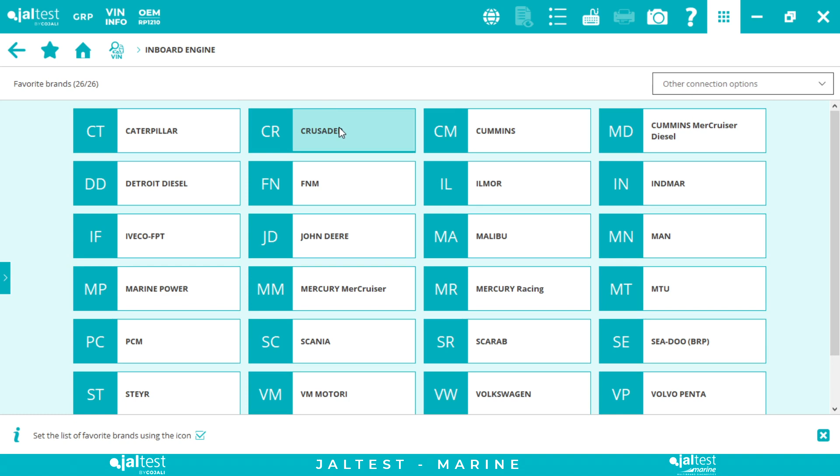Also very important brands like Crusader, Ilmor, Indmar, Malibu, Marine Power, Mercury, Mercruiser, Mercury Racing, PCM, Scarab, Sea-Doo. We have some gasoline inside Volvo Penta and Weber.

Let's go to outboards. Everything is gasoline: Evinrude, Honda, Johnson, Mariner, Mercury Racing, Nissan, Selva, Seven Marine, Suzuki, Tohatsu and Yamaha. Then we have watercraft, obviously gasoline: Honda, HSR-Benelli, Kawasaki, Sea-Doo and Yamaha. And we have stationary engines, which are all diesel.

We have 24 brands here, because one is a customized brand and model that I did, because they buy the engine from another manufacturer, so we can always customize our brand and model. So we have 24 different brands. Caterpillar, Cummins, Detroit, Deutz, I'm just gonna say the most important ones, John Deere, Kohler, Kubota, Mercedes, MAN, MTU, Perkins, Volvo Penta, Yanmar again.

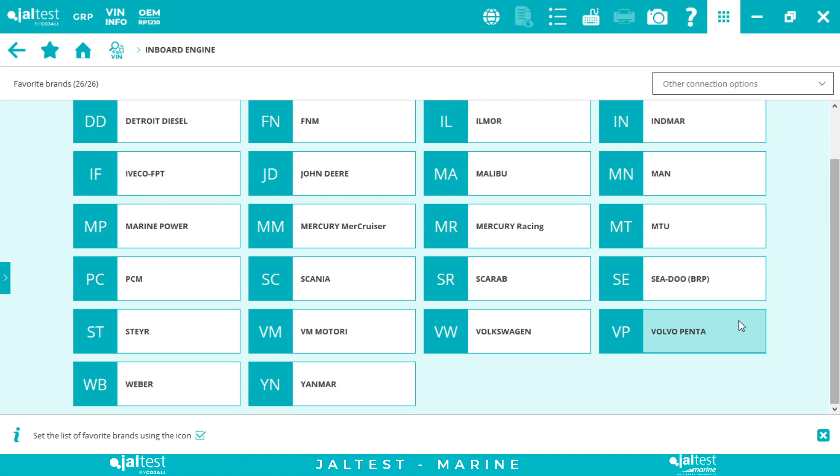Let's do a quick example. Let's go into inboards, to Volvo Penta. We have gasolines and diesels. Let's get into a diesel, for example, a D9. We're gonna see that Jaltest is an all makes, all systems diagnostic tool. In this case, it's a great example because we have the engine, but then we have the EVC technology. Depending on the vessel, it's just going to be one.

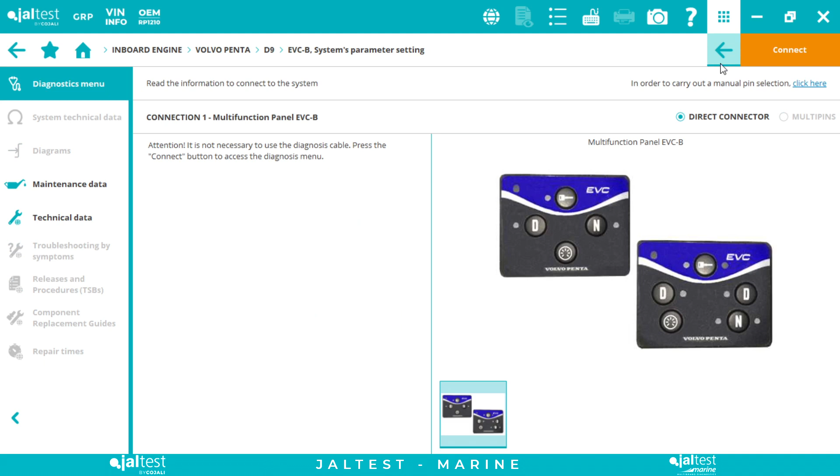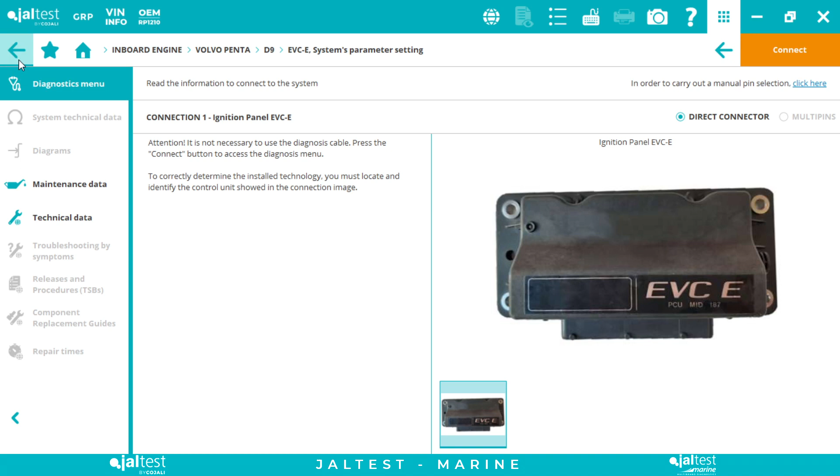We have, in this case, for example, EVC-B as a panel. We have to identify this, and for example EVC-E, you have to identify it with the ECM. Now if you click connect, you're gonna access technical releases. It's like a fictitious system, but you can change parameters and do calibrations following those technical releases. Then we have helm control unit, helm interface unit, powertrain controller, steering system control unit.

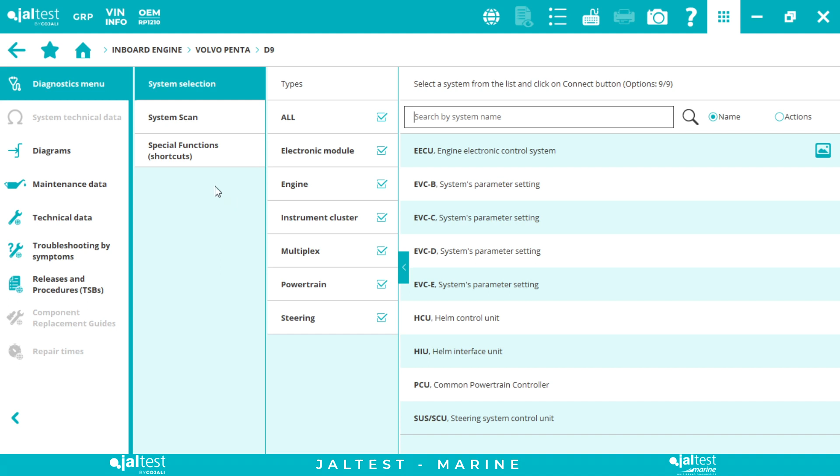If we connect, the best thing is to perform a system scan. You click into scan, and that's it. It will tell you what's included. The best thing you can do is to perform a system scan, so you will know exactly what's inside your vessel. You click scan and that's it.

Now the process begins. In just a few seconds we'll know exactly what we have, and also the fault codes that we have per system. That's an important thing. For example, you can have a view of the whole vessel, all the systems we have, and also the fault codes. Let's click into the engine.

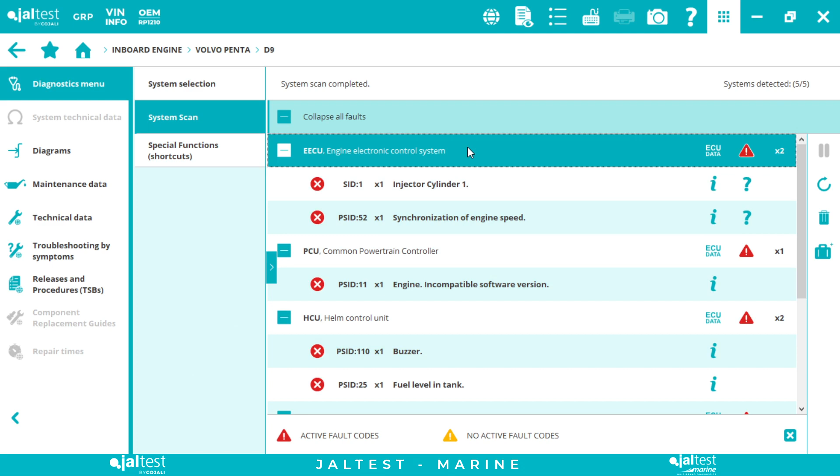I'm gonna click connect, and right now we're gonna access the diagnostics menu. Let's start with the fault codes reading. Same thing we saw just before. In this case, we have the trash; we can erase codes if they're non-active. We have the state of the code. We can read, obviously, generic and proprietary fault codes.

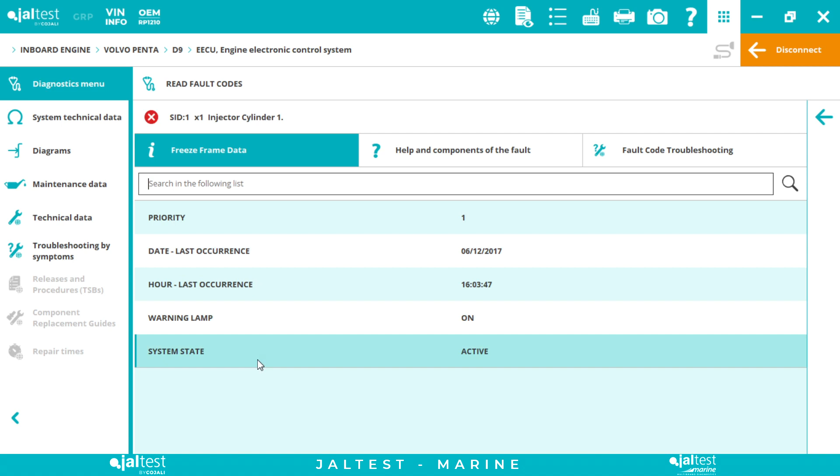A number of times we have the situation, description, and then we have two features that are great. One is the freeze frame data, and the other one is the help and components of the fault. We can tell you what exact components are related to the fault code and show you information about the component.

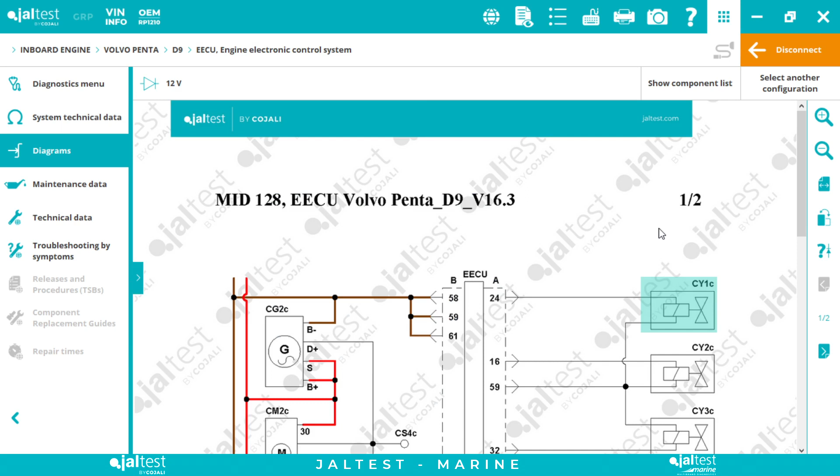Okay, and now as well you can click into wiring diagrams. You can select if it's a 12 or 24 volt system. You click and you will know exactly how that component is connected to the ECM with the wiring diagrams. And you will know also the pinout. That's important. Left and right we have the components, in the middle we have the ECM. You double click and you will access the pinout detail, location about the ECM. Okay, this is very useful.

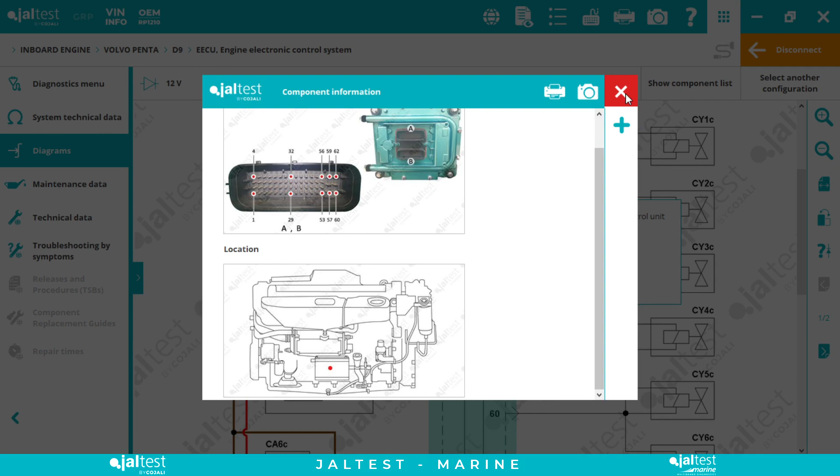You can always click into show component list. You will see the full list of components that are connected to the ECM. Let's go back to the diagnostics menu. You can clear faults from here. System data, we have the ECU data. This is what has been registered by the manufacturer, brand, hardware, software, etc.

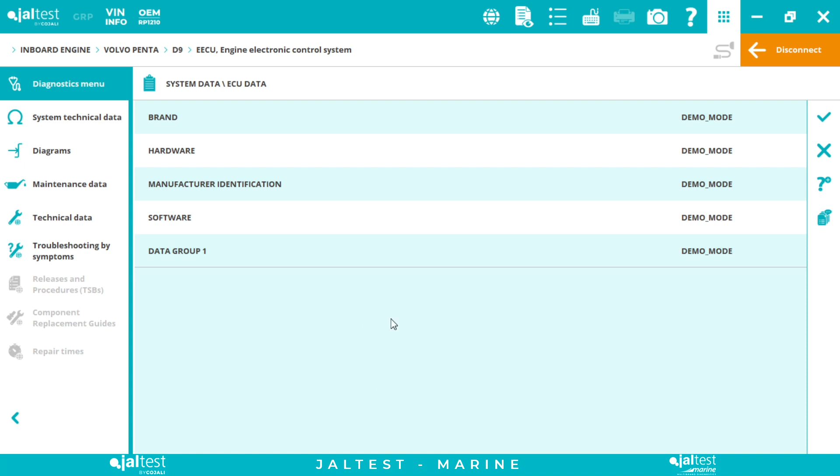Now you can also click into live data selection. We have three ways of seeing live data. You can see right now we have 455 measurements available. You have search engines everywhere in the software. You can select anything you need. Also you can select measurements by groups. Okay, so for example, let's select pressure and temperature, and let's select a couple ones.

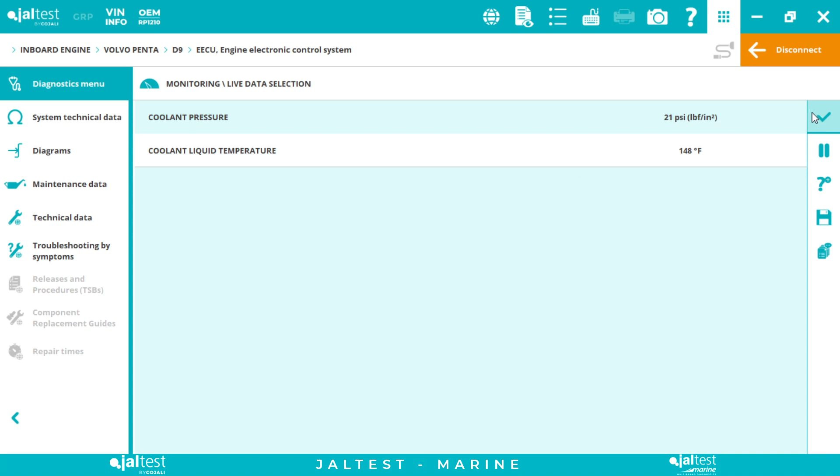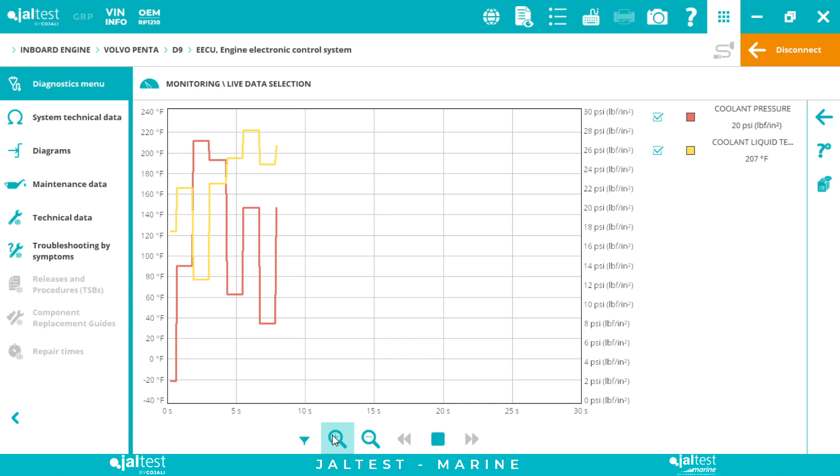Okay, so right now we can see the numerical value. That's the first option. Then we have the gauges. This is option number 2, and then we have the graphs. Okay, so here obviously we can select more than just 2 measurements, but in this case I'm just doing this example. You can just pause, increase, decrease. You can just stop, you can go back, etc.

Okay, the other way of doing live data, in this case you can perform sea trials with the data recording. You can select up to 24 measurements. You can perform your sea trial. You will see if you have your fault codes, when they get active or not, how the measurements were at that specific moment, and you can add some notes. Super useful for all marine technicians, and also for surveyors. We have a lot of customers that are surveyors, so that's very useful for them as well.

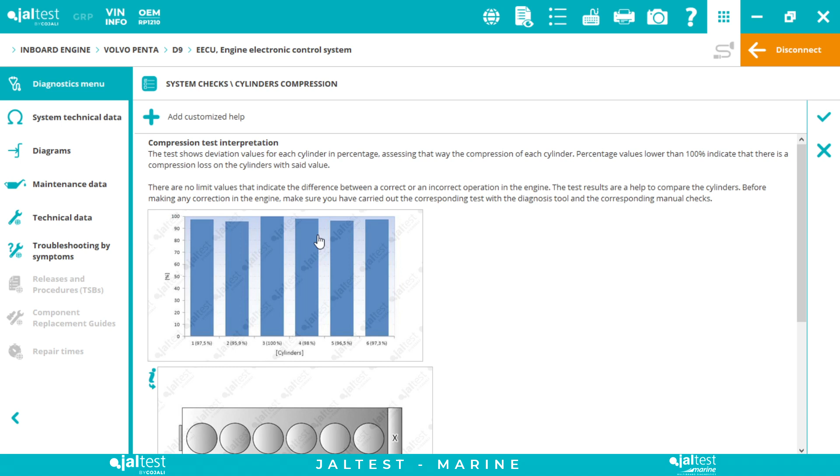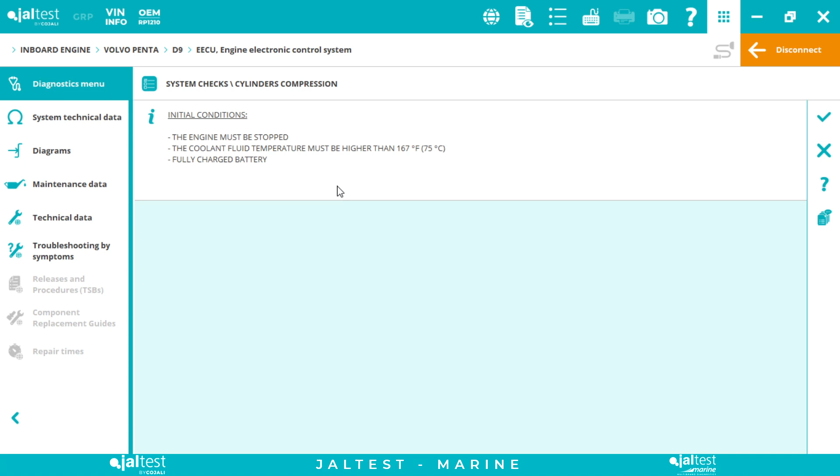Then this is step 1. We click. This is step 2, initial conditions. We must meet them, otherwise we won't be able to do it, or the results can be wrong. We'll click, and now after pressing continue, turn ignition key to start position and hold it, and the results appear. We have to do it for a few seconds. As you can see, this is guided diagnostics. We tell you step by step what you have to do.

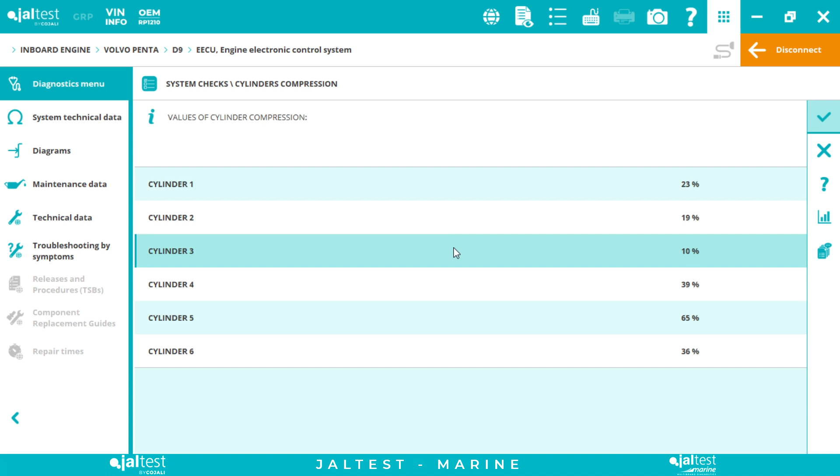Now you click accept, and then you will see the results, the numerical results, or you can also see them as a graph. Okay, so that's great. That's up to you how you want to see it. Now it tells you, okay, turn off the ignition for approximately 10 seconds, and that's it. You can use the clock if you want.

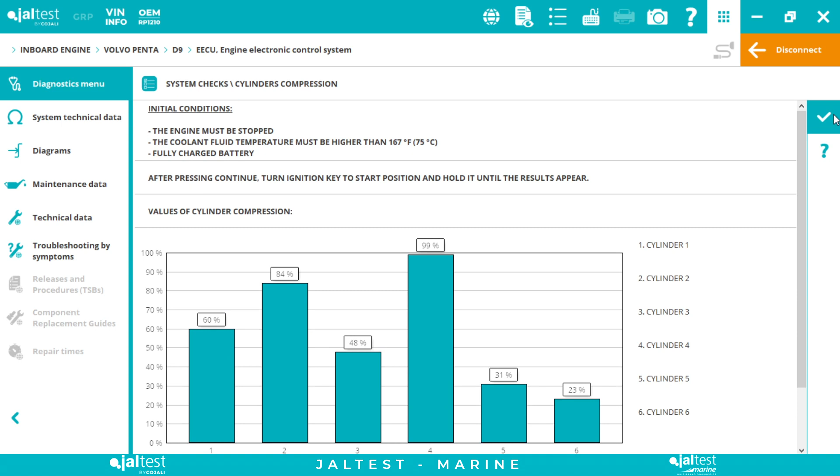Okay, now it tells you, do you want to display the results? You can click yes, you can click no, it's going to be saved anyway under the diagnostics report. Very important, being able to generate reports. Okay, that's super important. Okay, let's get into the parameters.

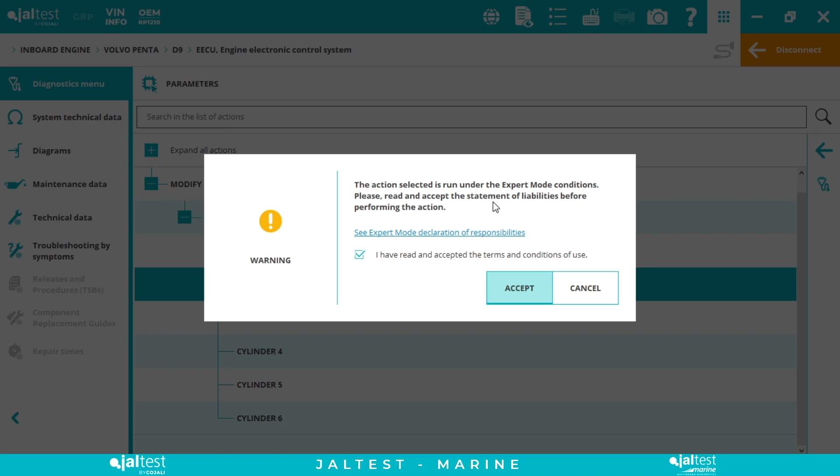Okay, here we can do injector coding. Okay, that's important, super useful. Same concept. I'm just going to click cylinder 2. This is the expert mode code. If you want to do something that requires writing on the ECM or an advanced functionality, you need that code. It's totally free. You can request it from your client area on our website, jaltest.com. Okay, again, step 1. That's why I wanted to do another example again. Same concept.

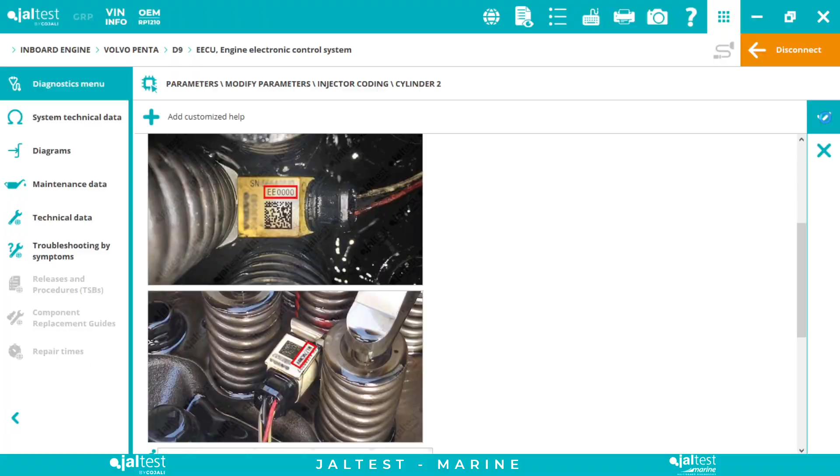What we're about to do, what you need to do this functionality. Let's click into accept. We have step 2, initial conditions. The engine must be stopped. We click check. And now we can just see the parameters and we can validate them. We can modify them.

Okay, so I'm just gonna put this process as finished, and it tells you, okay, if we continue, turn off the ignition key and wait for at least 10 seconds before turning it on again in order to reset the control unit. Okay, very simple. You just need to follow the instruction.

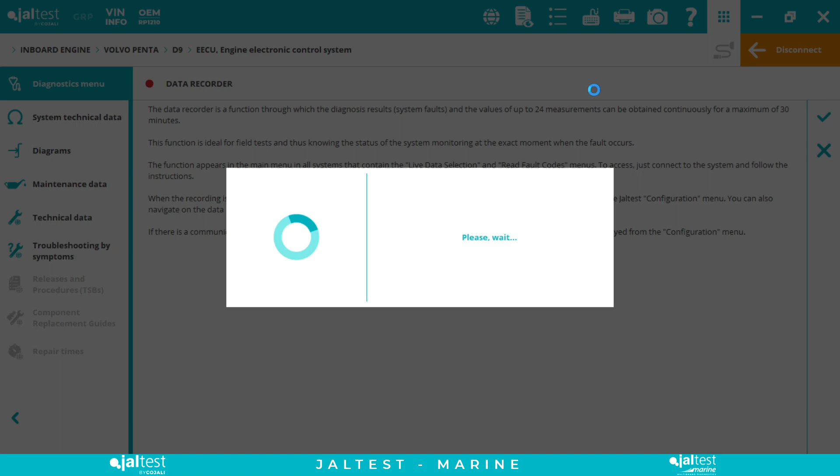Okay, so we're done with all the functionalities. Let me do a quick example with the data recorder for sea trials. Again, we can select up to 24 measurements, and we can record up to 30 minutes per session. Okay, let's click into check, and you will start.

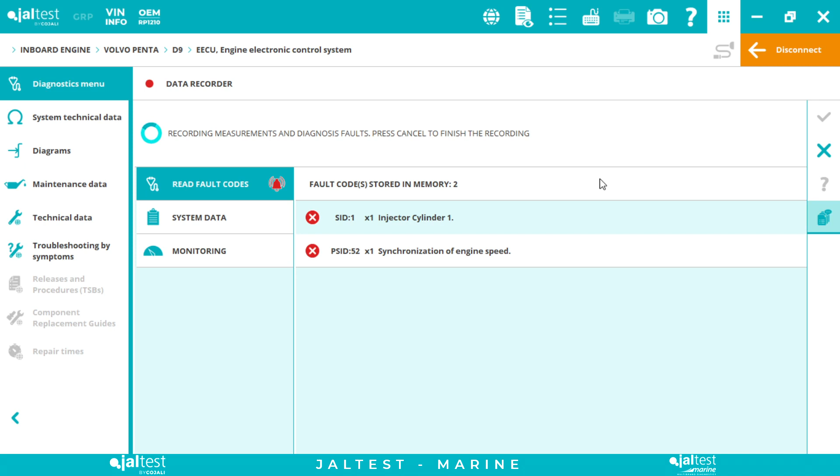Okay, you can see if you have some fault codes, you will see your measurements. You can even graph it if you want, see it with the gauges, and you can add some notes. Okay, for example, notes 1. You can continue with your sea trial. You listen to something or you want to add some notes, notes 2, and that's it.

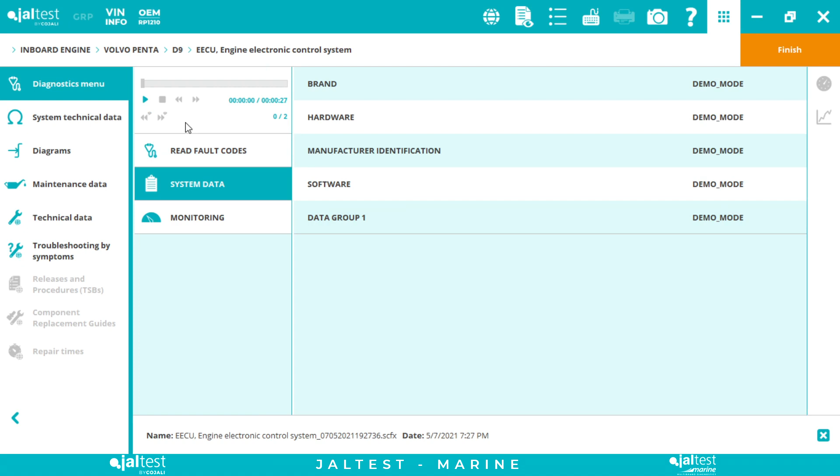Now you're done. You want to play the results, you can click accept, and that's it. Very simple. Everything's going to be saved in your computer. Okay, now you can click play. You say, okay, now in minute 4 second 30, I have my fault codes popping up. I have my guided diagnostics with the technical information related.

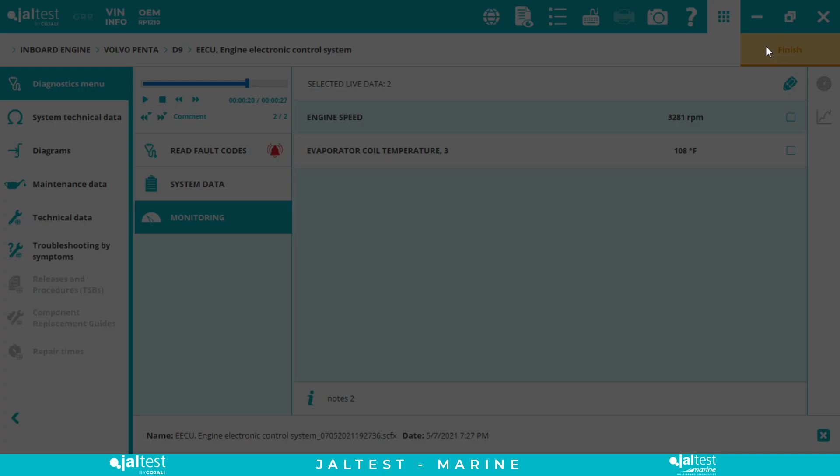I can see the live data. I can also go directly to the notes. Okay, notes 1 or 2. Okay, this is going to be saved in your diagnostics report. Okay, so now we click finish. Yes. Okay, let's exit. Do you wish to save it? I'm gonna click yes, and that's it.

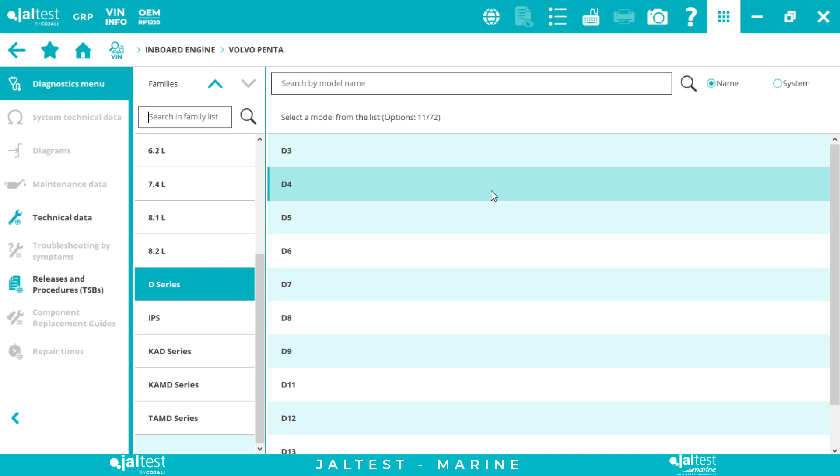Okay, if you want to export the data recording to an Excel sheet, it's mandatory to save the diagnostics report of that same session in order to do it. Otherwise, you won't be able to do it. Okay, so we're done with this example.

Let's do something with outboards. Obviously with Mercury. I could choose also Yamaha, but Mercury, I believe it's the #1 gasoline recreational brand. You have all the families. We cover even the V6 and V8. We have a fantastic coverage up to 2020.

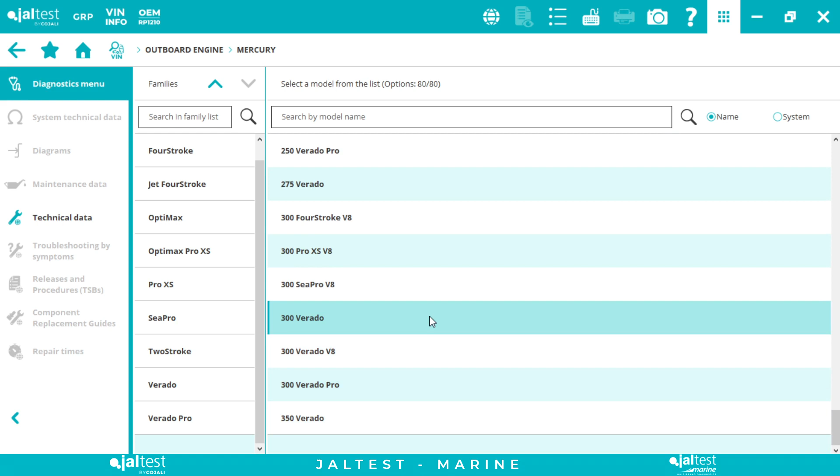It's not just the engine. Okay, it's also the peripheral systems such as the DTS, the TVM, etc. With the DTS, you can do the DTS calibration. Actually, we have a vlog, super useful, step by step. You have anyway all the information inside. Let's connect into the engine.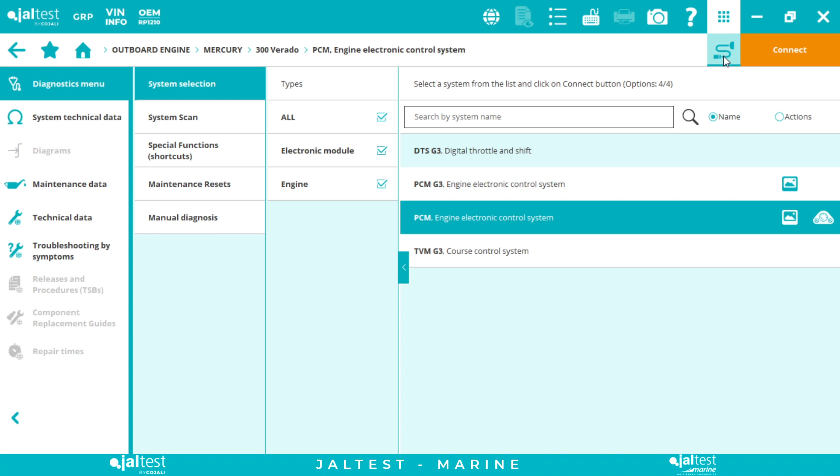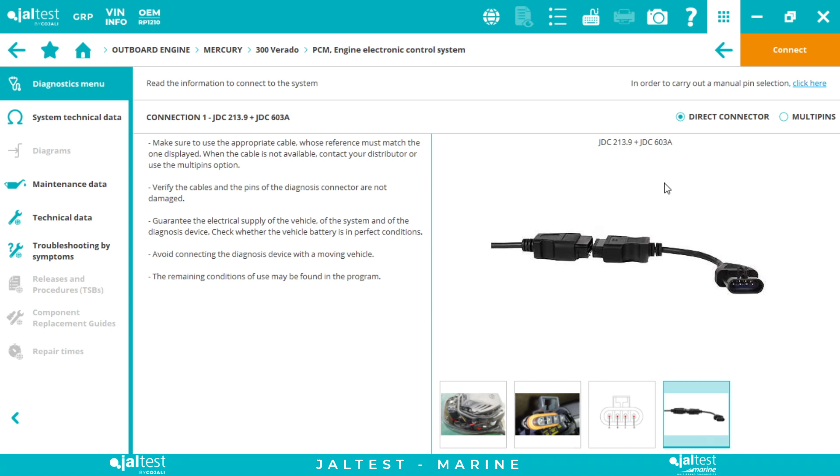As you can see, we can connect, for example, to the PCM or PCM G3, depending on the system we are. Same concept. Where is the connector, the details, pinout details, and the cables you need with the part numbers. Okay. If you don't have the cable, you can use this as a plan B. It's the multi-pins, and we give you the exact pinout.

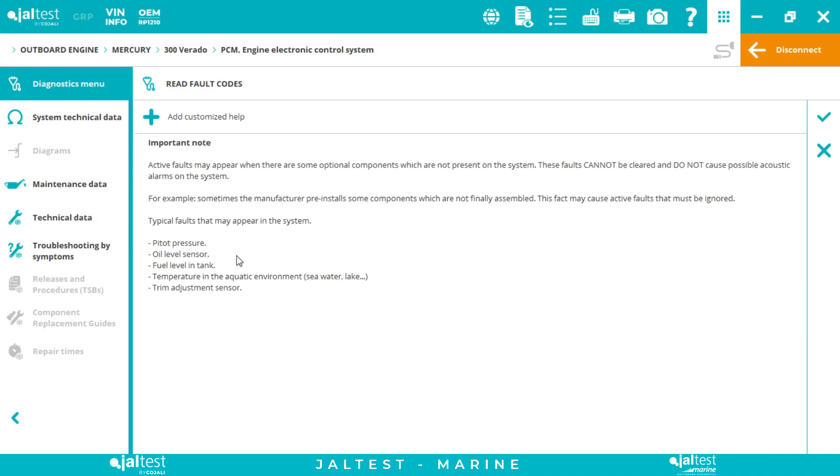Now let's connect, and we're gonna go to the diagnostics menu. It's the same software layout such as with Volvo Penta or any other brand. Okay, same concept. If you click into read fault codes, same thing. You're gonna see the same structure, the state of the code. You have the description and the code.

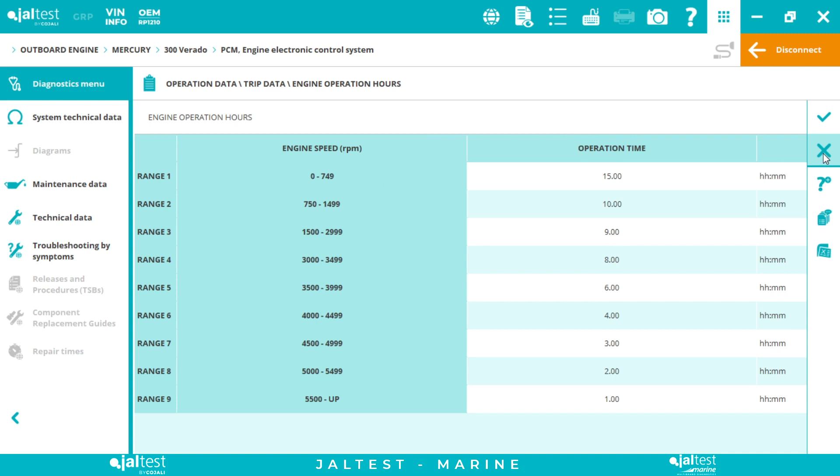You can clear fault codes, system data. You have the operation data. Okay, trip data reset, engine operation hours, for example. Okay, with all the ranges, with the RPM ranges. Okay, also super useful for surveyors, and any other technicians.

Live data is going to be the same concept. I'm not going to show it again because it's exactly the same. We can activate components, activate and deactivate these components. System checks, cylinder cutout. We did before, I think it was a cylinder compression test. Let's do a cylinder cutout, same concept.

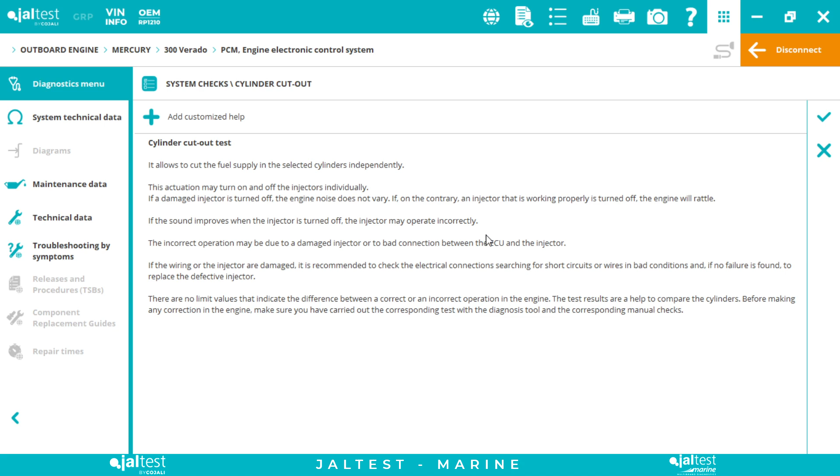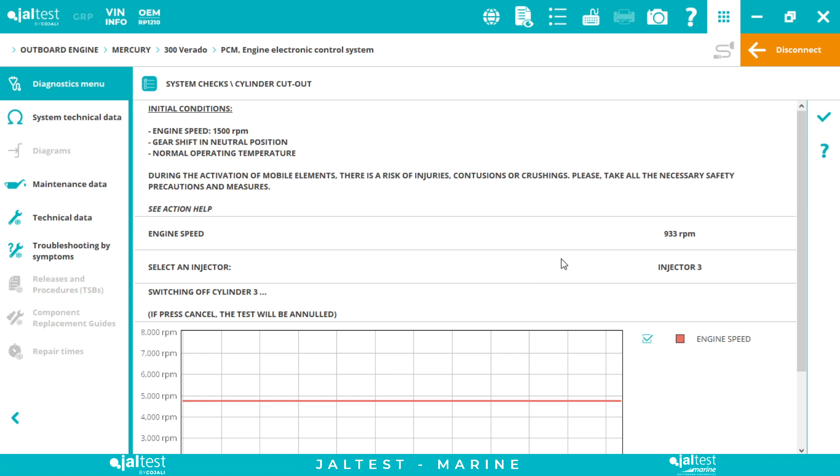Step 1, what you're about to do. Step 2, your initial conditions. And then step 3, we're gonna select and do our functionality. Very simple. We have our results. We can select all the injectors if we want, and then we can display the results. Same concept, it's the same thing, brand by brand, model by model.

Okay, what else? Parameters, engine location, tachometer, calibration with the adjust the trim limit and trailer mode. And then we have also the data recorder. That's exactly the same as with Volvo Penta and any other brand.

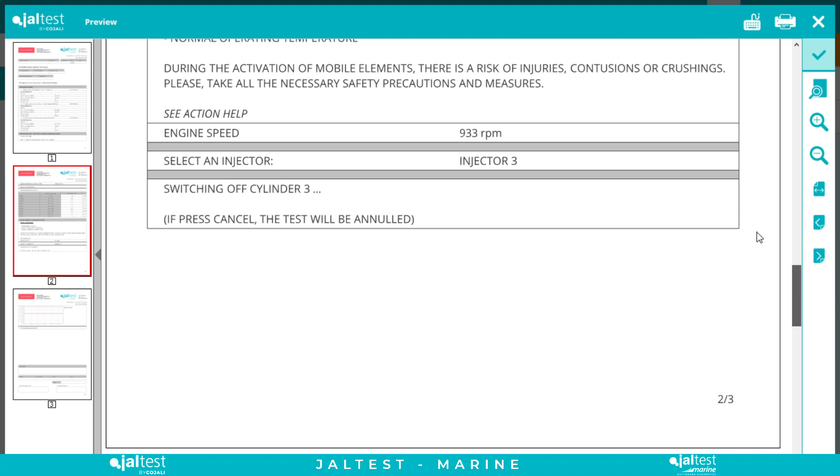Let's click into the Diagnostics report preview so you can see how we offer all the information. You can put your logo in here, your company's information, the user, because you can create different users. Everybody is going to be identified, date, time. You can save this under a specific customer, vessel, and everything we're doing is being saved in the GRP module. Okay, that's a super useful module.

You can connect all your devices and share everything on the cloud for free, so it's a great thing. Even if you have only one computer, if you're sending your information to the cloud and your computer gets damaged, you won't lose your information because you can then install it on another device, another laptop, and retrieve all the information. Now we have technical information, very useful.

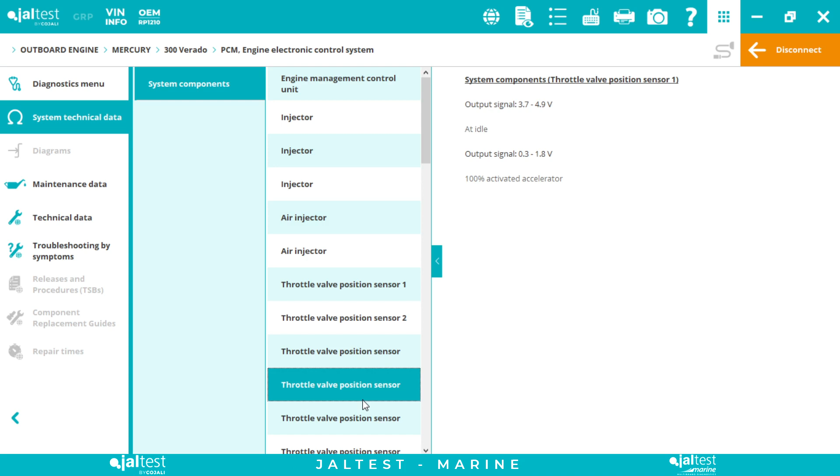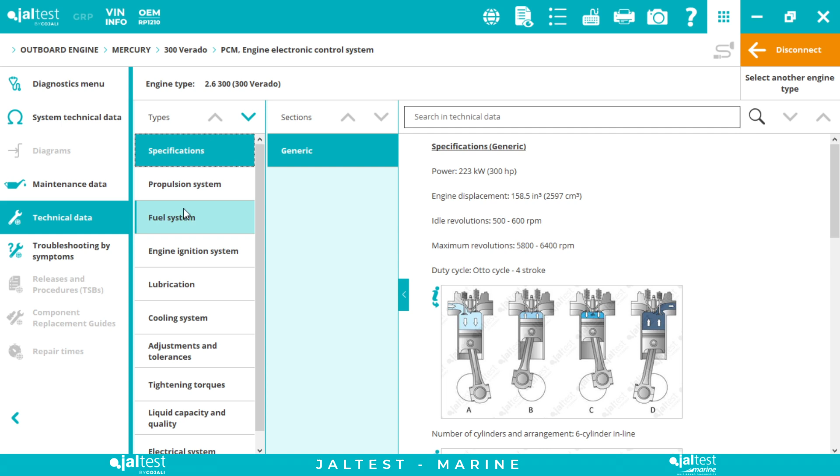Okay, you have also your technical data. Let's just see this option. Pretty much the same concept, brand by brand. Okay, so this is part of the info online. It's a free license that's included with your tool. You have some generic specifications, fuel system, lubrication, the cooling systems, tightening torques, flywheel, connecting rod. You can have the order, and also if you have to apply force or angle, we're gonna tell you that information. Okay, super useful.

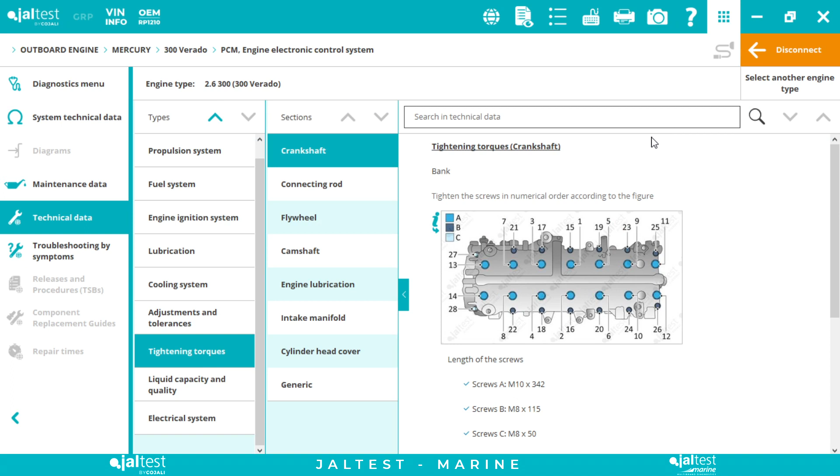It's not diagnostics, it's technical information. That's why we say that we outperform many of the OEM tools, because we're capable of offering this information within the software and relating diagnostics and technical information, vice versa, diagnostics and the management tool, or diagnostics and customer support.

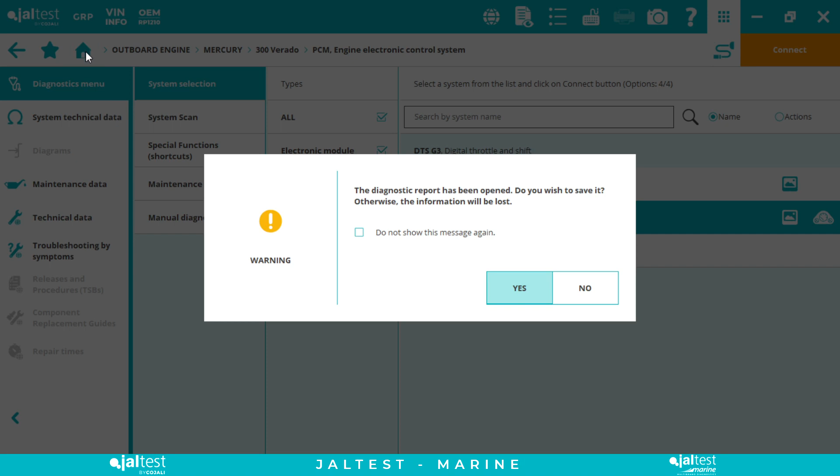Okay, let's exit. Let me go to, for example, jet ski. Okay, let's go to a Sea-Doo. Let's select a GTI 4-TEC, multi-systems. Okay, all systems. It's not just the engine. You have the brake management and reverse gear system, so if you want to do your gate calibration, instrument cluster, multifunction electronic system. I'm gonna access the engine.

Same process. Where's the connector location? Another picture, we have the pinout details and the connectors you need. Okay, you click connect. Same thing, we have done inboard, outboard. Now we have done a jet ski. Same thing, we have reading faults, operation data, live data. We can activate components, do your system checks, change your parameters. You can do key recordings. That's a key functionality on jet skis.

Same thing, step 1, all the information you need in order to do this functionality. Now you click check. You have step 2, and then you have the way of doing everything. Memorize the key, clear the ignition key, clear all the ignition keys. If you have doubts, you can click the question mark and you go back to step 1.

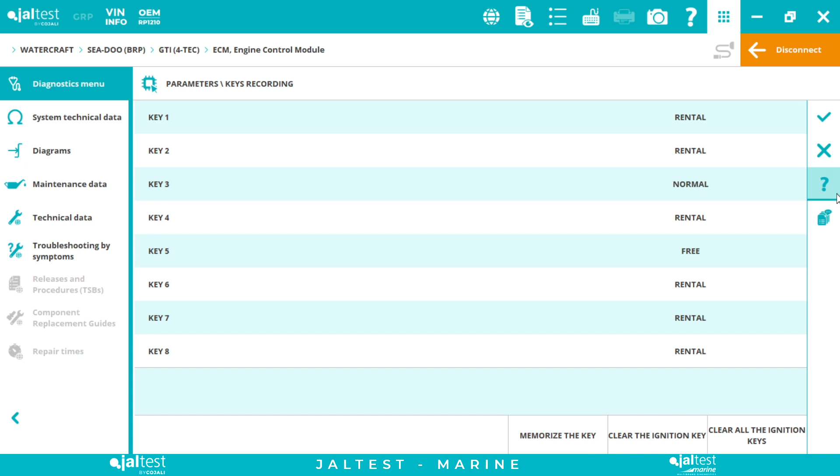As you may know, on jet skis you have 3 types of modes. You have normal, learning, and rental. Depending on what you select, you will have some speed restrictions or not. It tells you step by step what to do, so it's very simple. On Yamaha and Kawasaki, you have to do it manually, but we provide you the technical releases in order to do it, and also that little plug cover in order to do the key recordings.

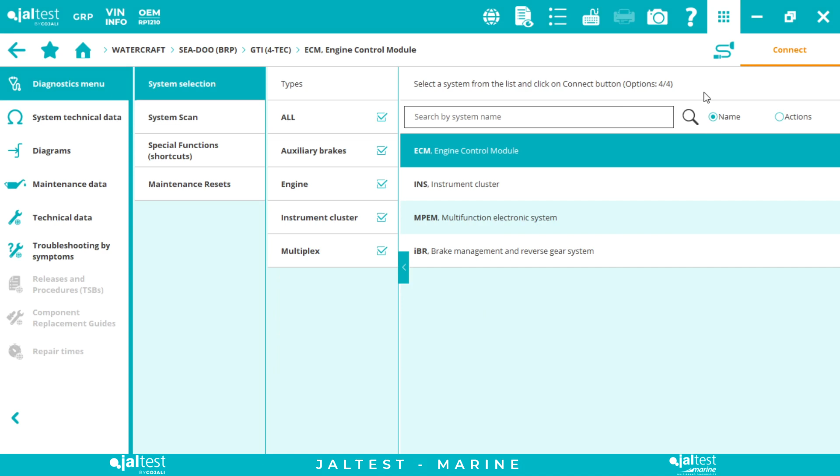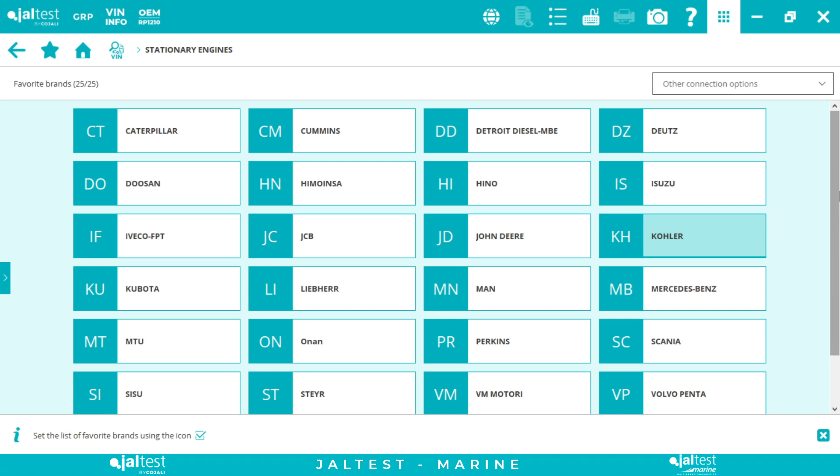Okay, so we disconnect, and for example, let's go last but not least, stationary engines. Fantastic module. We have a lot of customers that use it for gensets, compressors, hydraulic pumps, water pumps. Let's select, for example, a Caterpillar. We can go to a C6.6.

Again, multi-systems. Why? Because here it depends on the communication protocol. We have CDL and J1939, we have the aftertreatment system, but we also have the electric power generation system. Okay, so it's not just the stationary engine, it's also the genset. Okay, you can click and see all your functionalities.

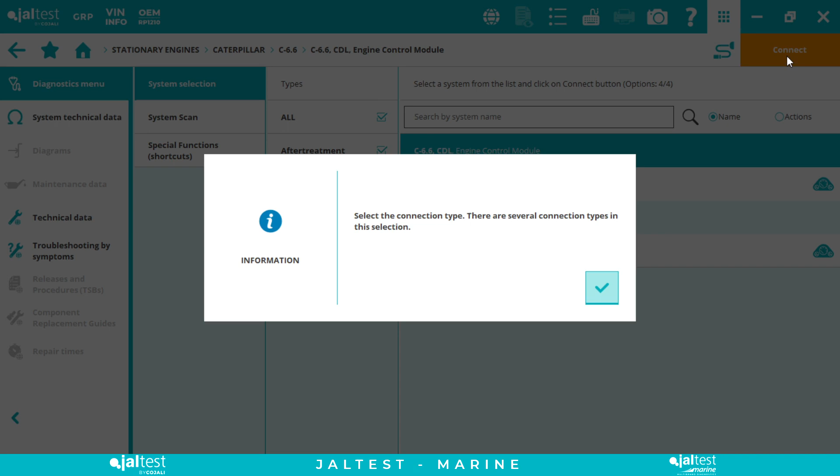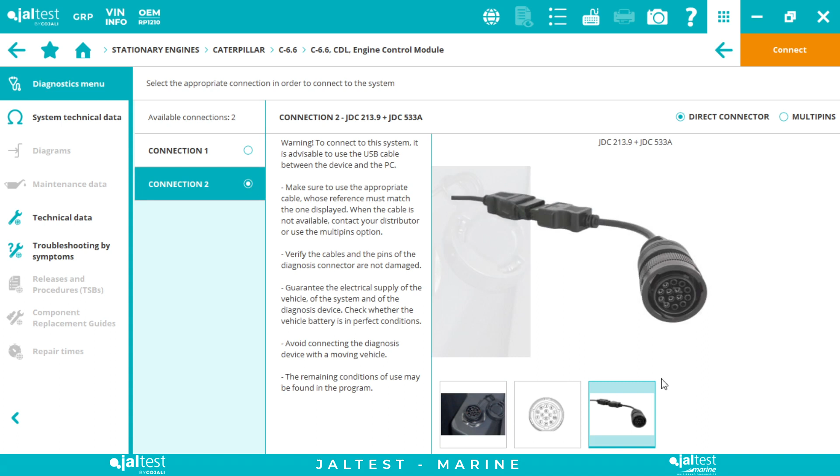Let me click into the engine. I will click connect. Same process, connector, pinout, cables you need. You have option 2. You know that Caterpillar also uses this cable, and you click connect.

Okay, so we have the same thing: read faults, clear faults, system data. Okay, here we have the ECM ratings. Okay, so in some brands and models you see that operation data menu, and in some others you have to find it inside system data.

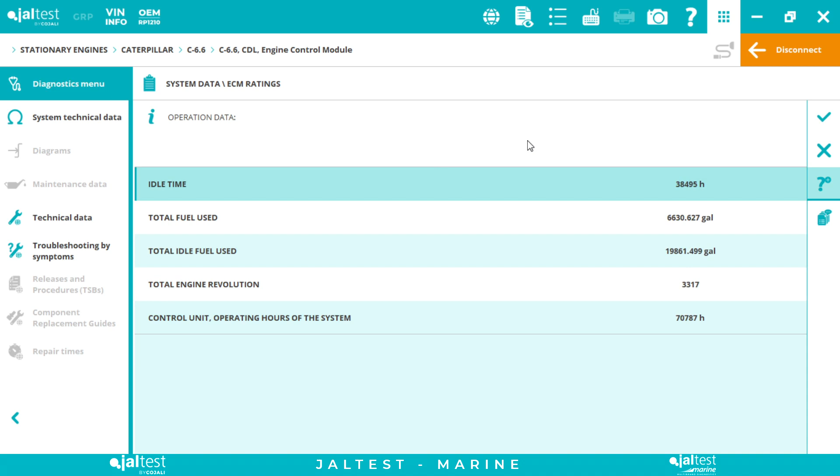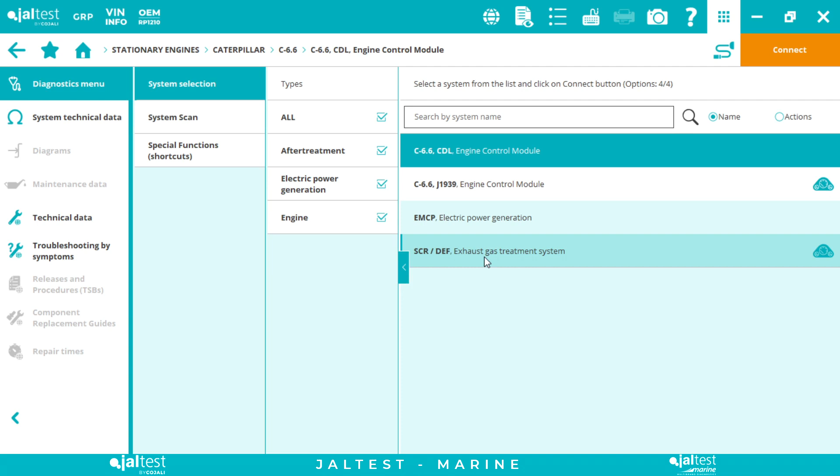Live data, we have the system checks, and also we have the parameters changing, for modifying your codes, injector coding, injector exchange, etc. Okay, data recorder, same thing, same concept. That's what I want to show: 4 different brands and models in those 4 different menus.

Let's go into the GRP. This is the garage resource planning, our management tool. You don't need to have internet when you're doing your job. If you don't have it at that moment, you can just go back to your shop or to your place, and when you access the GRP, it's going to ask you to synchronize. So you can do it, and then it's going to be saved on the cloud, again, for free.

Fantastic tool. We can create a customer list. Okay, you can then create different vessels or machines inside that specific customer. You have your contact details. Okay, we have a webinar, actually a 1-hour webinar just about GRP, super useful.

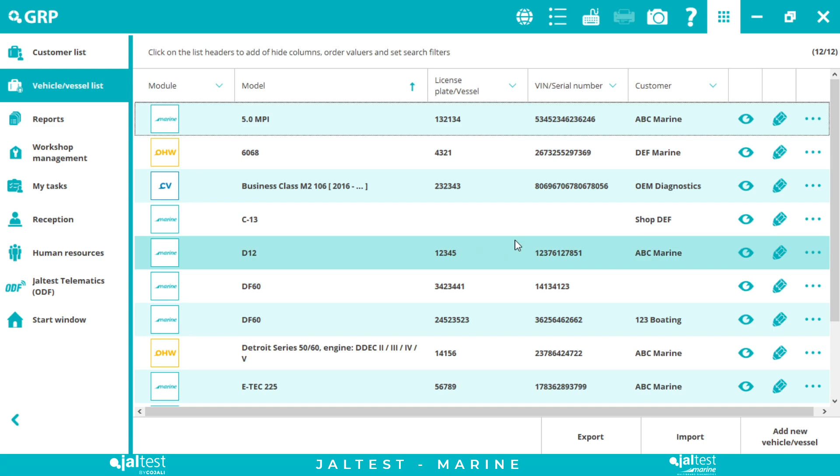Vehicle vessel list, and if you have not only marine but other projects on the same tool, you can have the model, license plate, VIN, serial number, customer. It's super important to add all this information, so then you can filter and retrieve that information very fast.

Now reports, you can access all your diagnostic reports, maintenance reports and your work order reports. That's why I'm saying it's so important to put all the information, because right now this is super easy to retrieve, but all this is going to be difficult. We have the name and we have the date, and that's why we need to add all this information.

Okay, workshop management. Here we have work orders. We can assign work orders, and we can create different tasks inside the work orders. Again, if you want to get more knowledge on the GRP, check our GRP webinar. This is the task. Okay, workshop time reports. You can just retrieve it by user or by vehicle vessel.

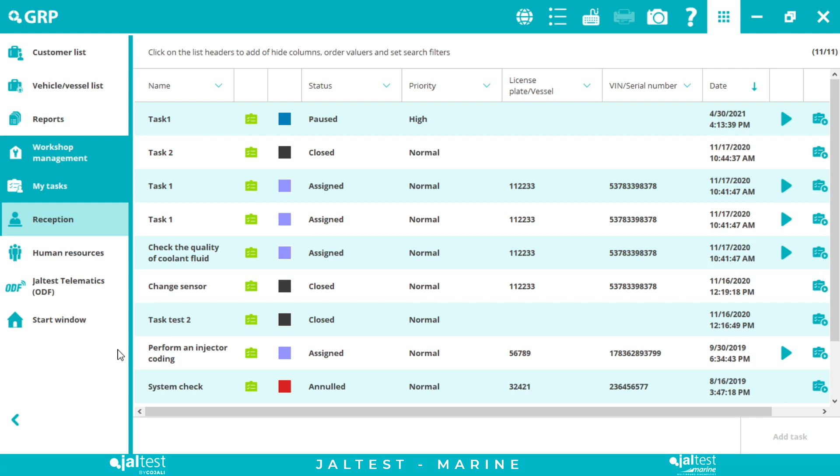In tool use history, you will know who's using the tool, when, for what type of machine, model, start and end time. Okay, now let's go to my task. When somebody is sending you a task, you will receive it here. You will see the name of the task, the status, the priority, for what type of vessel, date. We can even record the time that you're spending for each task.

Reception: when you're in a shop or in a company, maybe you have somebody working in the shop, another one on reception and another one in the office. As you can install the software on up to 3 devices, you can install it on those 3 laptops, and as you can share the information on the cloud for free, it's great. In reception, you don't have to get involved in the shop, you can use it only for the management tool. So you can create your reception forms, and they will be available in workshop management, so somebody else, if they want to assign work orders or anything, can use that form.

Last, human resources. From here we can create the different users and types of users. Depending on the type of user, you have more or less restrictions or rights. Again, check the webinar about the GRP to know exactly what you can do with one type of user or the other.

Okay, so last thing, Jaltest is 4 things: advanced diagnostics, technical information, the management tool, and of course the customer support. You can contact us by phone, by email. We can also do remote assistance, and if you want to contact the engineering department directly, you can use Jaltest feedback, not only for problems but also for suggestions or information. This is something great about our company. We're very serious about customer support, and you need to be supported. You're gonna have situations and you need to solve them as soon as possible so you get your job done.